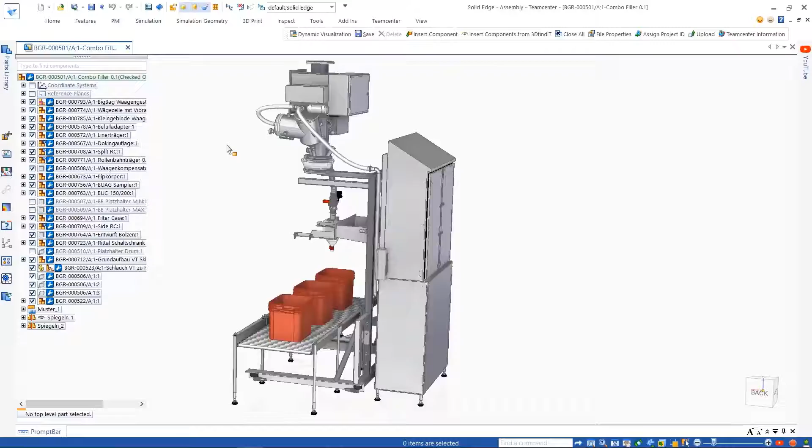Scalable data management solutions from Solid Edge help users face the challenges of increasingly complex products and processes. Teamcenter integration for Solid Edge leverages the best-in-class product lifecycle management tools of Teamcenter to address many of these challenges.

Dynamic visualization allows the rapid generation of reports which appear in both table and graphical forms. These reports help users make decisions faster by ensuring you're using the right information at the right time.

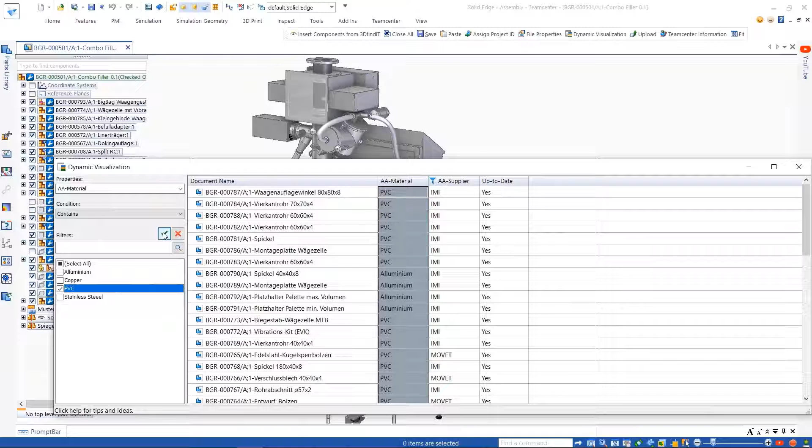Here we'll create a report which queries parts from a particular supplier that are made in a certain material. To start, we simply select the desired columns. We can filter as many columns as needed. A rule is created with a list of components matching the defined criteria, and when run, appropriate temporary colors are applied. We can also use the rule to select components. These rules can then be saved and shared with others.

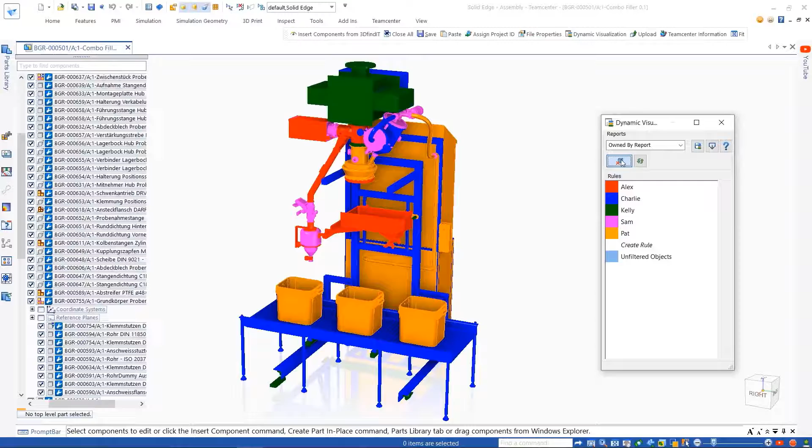Reports can also be imported. Here we have a rule that filters and highlights components owned by specific users. A different color is used for each corresponding user. We'll edit the rule for Pat and modify it to only include the components with a status of work in progress and that have been modified after a certain date. Applying the rule shows the filtered parts in orange and shows that Pat is currently working on this switch box.

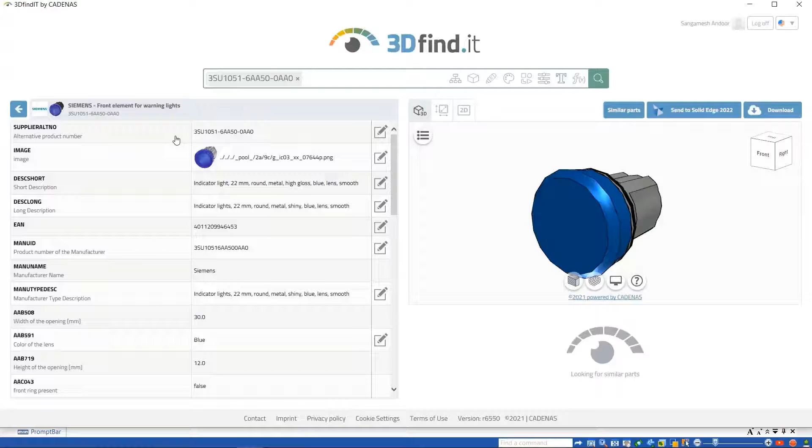Teamcenter and Solid Edge continue to make further improvements to ensure more efficient data reuse, saving time and rework. In this example, 3DfindIT is used to search our extensive supplier catalogs and find a new warning light switch to incorporate into the design.

However, since an identical version of this part already exists in our Teamcenter database, it intelligently and automatically places the existing released part into the assembly instead of creating a new item in Teamcenter.

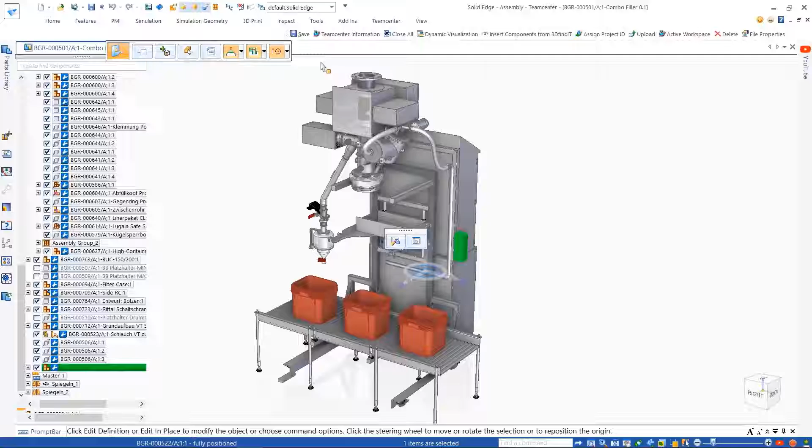Also new is better integration with Teamcenter projects and a new Assign Project ID capability where we can assign and unassign project IDs to multiple documents simultaneously.

Turning our attention to Solid Edge's built-in data management functionalities, we can see that dynamic visualization is available here too. With dynamic visualization, we'll perform a quick material check on our Fiamma espresso machine to confirm the right materials are assigned to each part. Once the report is run, we can see an issue.

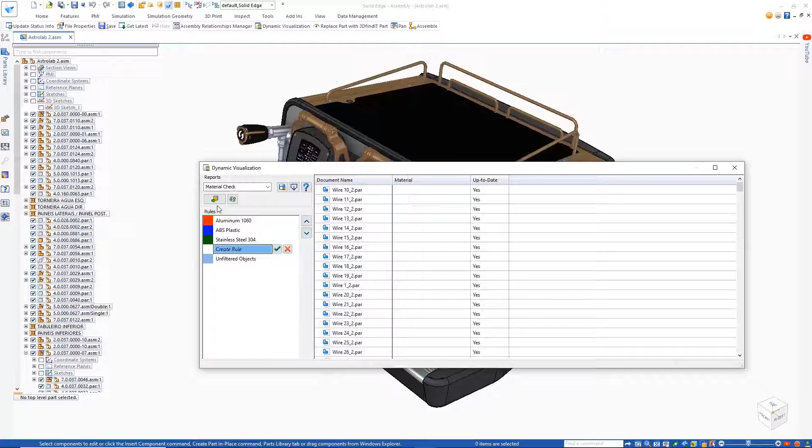The two small handles at the rear of the design are colored red, indicating they are currently defined as aluminum, but they should be green in this case, signifying they are stainless steel.

To correct this, we'll ask the design team to revise the handles and correct the material definition. The Update Status Info command forces an update on our design and retrieves information, including new revisions. The Pathfinder then clearly illustrates the revisions are available.

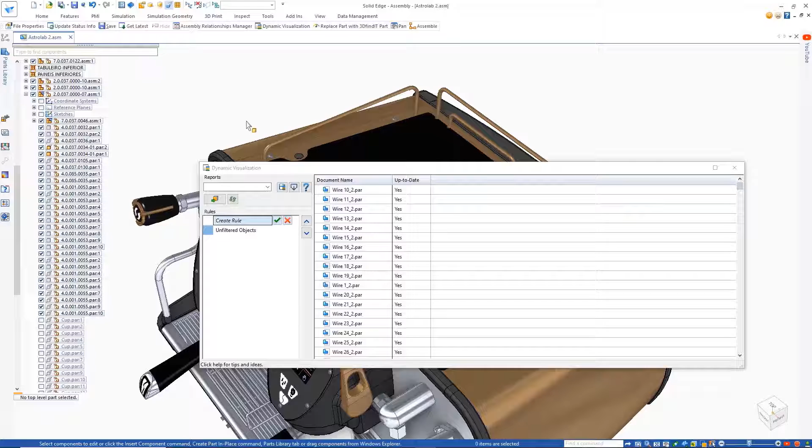The Get Latest command then provides a visual cue to users working in a collaborative environment and allows us to update the assembly by replacing the older revisions with the very latest. Running dynamic visualization again allows for a quick visual check and ensures everything is now in order.

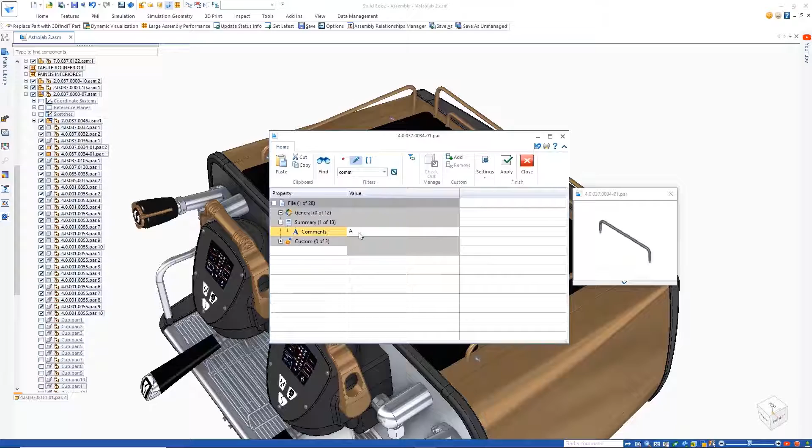A modernized, powerful File Properties dialog makes it even easier to search for, maintain, and manage document properties and metadata. We can filter the information to show only the editable properties and add new ones. In this case, a custom property to define the finish for the handle.

The newly added 3DFindIT and Replace Part with 3DFindIT commands allow users to streamline the process by finding 3D components by searching supplier catalogs for parts that are similar in shape to the selected model. We can see this in action here as we look for alternatives to the rubber foot. Once we have chosen the replacement part, we can change the parameters if needed, and then at the click of a button replace it in our assembly.

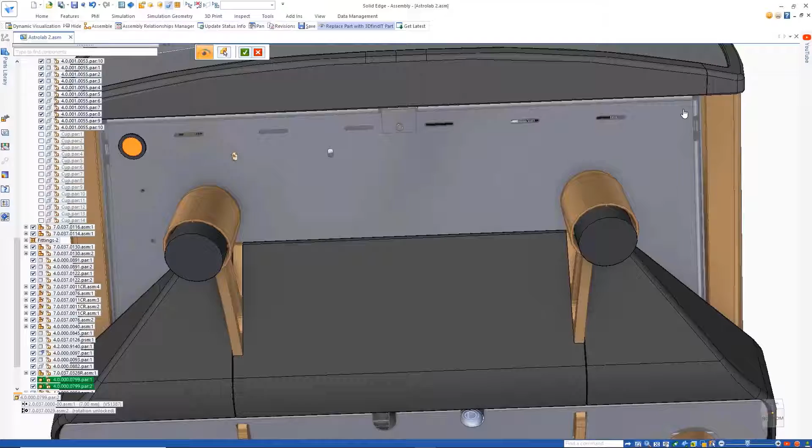The ability to use Pack and Go directly from Windows Explorer saves time if the desired assembly isn't already open. These enhancements in Solid Edge's scalable suite of data management capabilities, along with many others, streamline and simplify the management of design data, improve collaboration, and help reduce time to market.